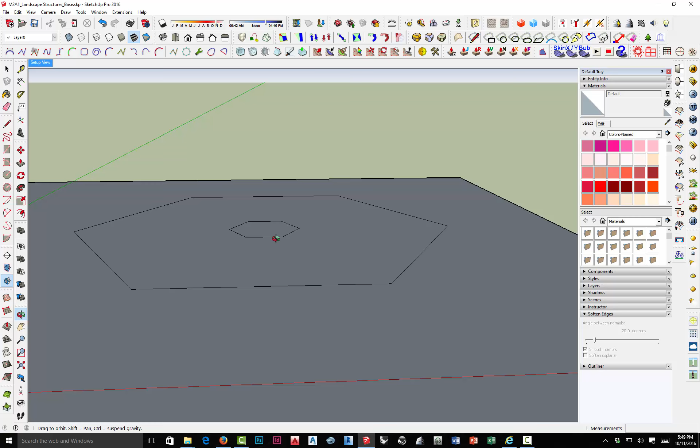For starters, remember we're going to use this as a path, but not all of it. So I want to right-click and choose Explode Curve. Now I'm going to pick the pieces that I need, Shift-Select, Extensions, and Weld. Now that I've got that selected, I am going to use the Move tool and do a copy of that. I'm just going to drag it up here and type 1.5 feet. And now I've got my starting point.

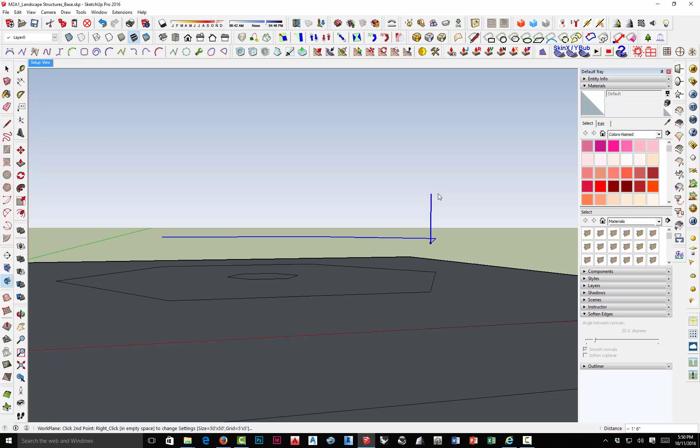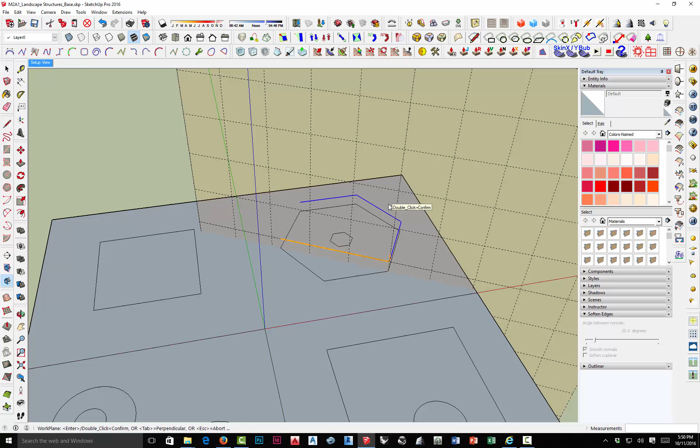From here, I want to draw a cross-section of the bench perpendicular to that line. Since I need a surface perpendicular to that, I'm going to go to Tools, Work Plane, and choose New Plane. I'm going to start by clicking on my origin for the plane, and I want to define the vertical. It doesn't matter how far you drag this up, just as long as you get the blue axis. Next I want a perpendicular plane. If I spin around here, you can see that that's not perpendicular, but this line is. By clicking on there, I've defined that new work plane. You'll notice if I hover here, it says double click to confirm, which I did. Now I've got a nice work plane that I can draw my bench cross section.

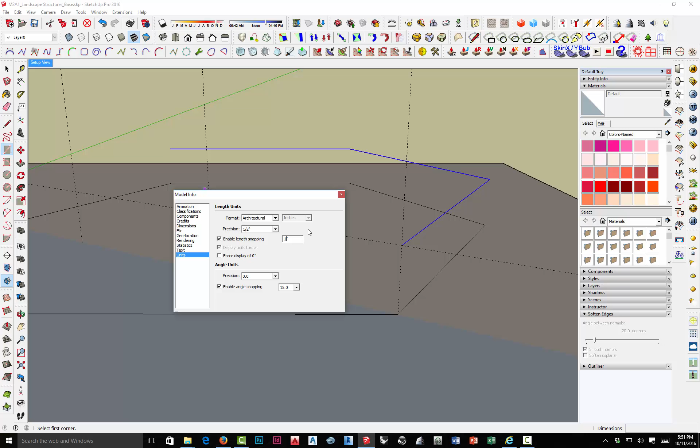To do that, I'm just going to use the rectangle tools. The other thing I want to check is Window, Model Info, Precision. I want to go down to 1/2 inch, and snapping also to 1/2 inch, then hit Enter. Now I've got that accuracy, so I can do a 1.5 by 3.5 inch 2x4, which is the actual dimension of a nominal 2x4.

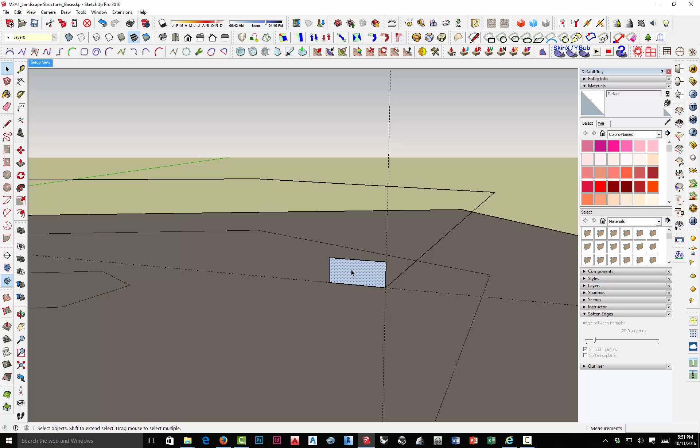I will start here at the end, and you can see if you look at the value control down there, I've got 3.5 by 1.5. Then I'm going to double click on that, use the Move tool with control to copy it, and do a 3x. So I've got my 4 2x4s lined up there, which will be the seat of the bench.

Just hold Shift and double click on each of those, and I'm going to make a temporary group. I don't have to do this, but it keeps my geometry separate, and I'll ungroup them later to do the follow me tool process.

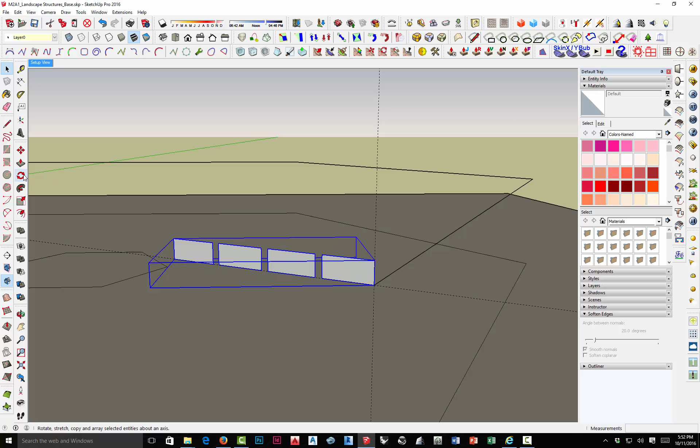Now I want to use the rotate copy. This is my center of rotation, my reference point. Tap Control, and there's 90, and in class I just said, well, let's make this 100. That puts me in a pretty nice angle. If you want to change it a little bit, that's fine with me. Once that's done, I'm going to move this to here, and then 1/2 inch above that. Again, you can see in the value control box in the lower right corner, it's at 2 inches—that's 1.5 and 1/2.

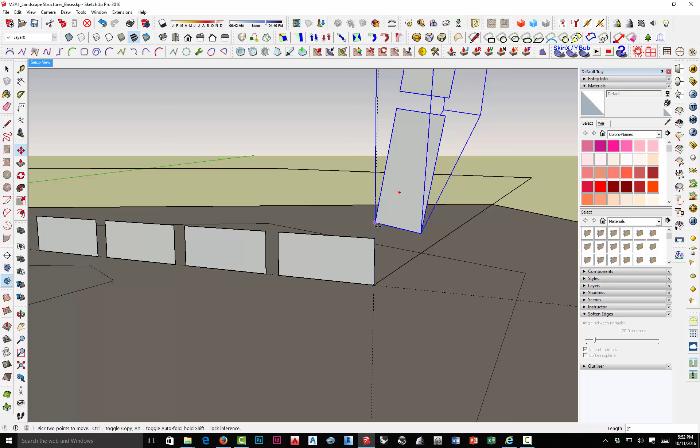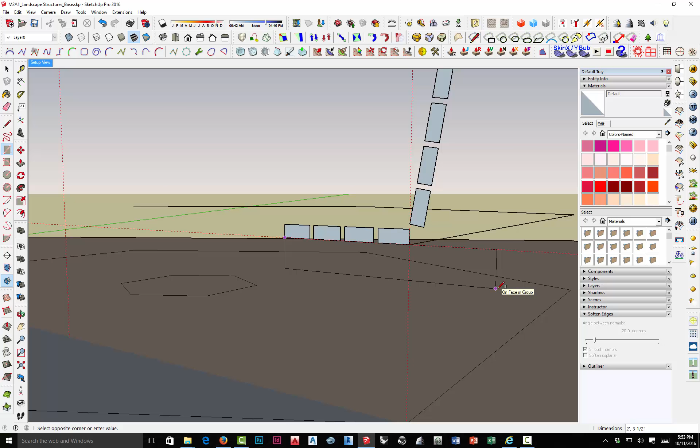Okay, so there I've got my cross section, my bench seat, and my bench back. Then I'm going to go back to my rectangle tool. A couple of you in class today somehow did this and it wasn't lined up, but if you snap to there and you keep on this plane, it should keep it perfectly lined up with that surface—this line should be right along the bottom of those. Since this is going to be another 2x4, I need to have it 3.5 inches, which again you can see in the lower right, and I'm going to make it 2 feet, so it's 2 feet long by 3.5 inches tall.

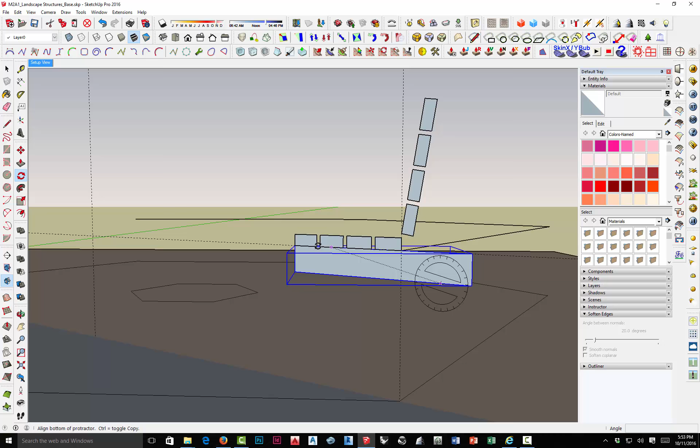Once I draw that, double click, group it, and now I can also do a rotate copy with that. I'm just picking it—I can do it from here, it doesn't really matter, but I know I don't have to rotate it way back here, so I'm starting just somewhere in here. Click, reference, tap Control, and in this case I'm going to hover over that and move till you see that magenta highlight, and now I know I'm exactly parallel with those.

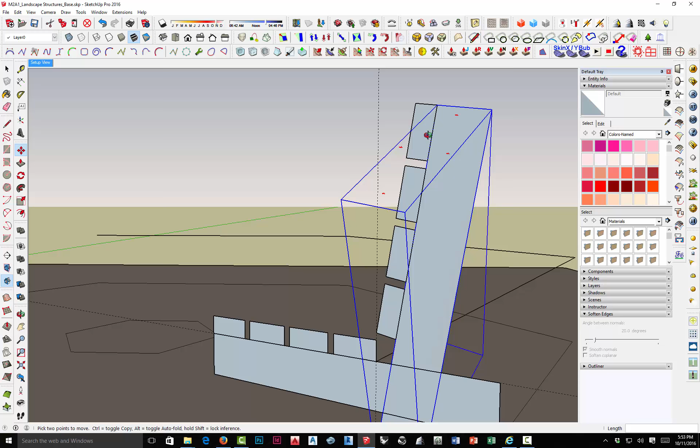Now I'm going to grab this corner and snap it right to that corner. You can see when I first started moving it, it wasn't quite catching, so I zoomed in and got the corner, and now I can see it snapped exactly along that path. So I've got that in there, but it doesn't really line up — I've got these extra pieces, and I don't really want that.

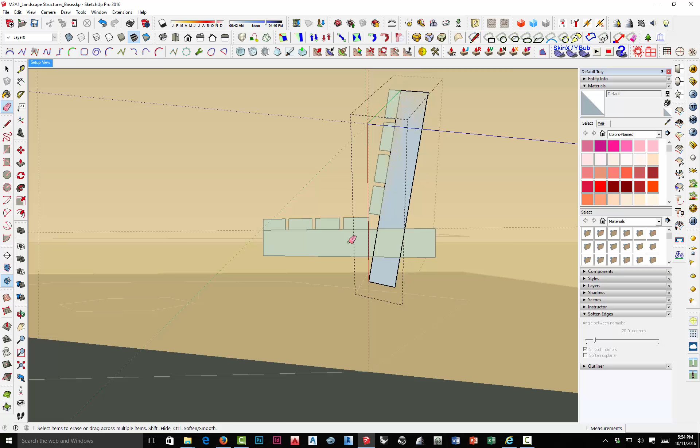So let's start with this one. Open this group, get the line tool, just draw across this intersection right here, activate the eraser, and erase these pieces. You can do the same thing with the horizontal one — double click on that, activate the line tool, draw that, get the eraser, take care of that. That will become my bench support and the back support, and we'll leave that for right now.

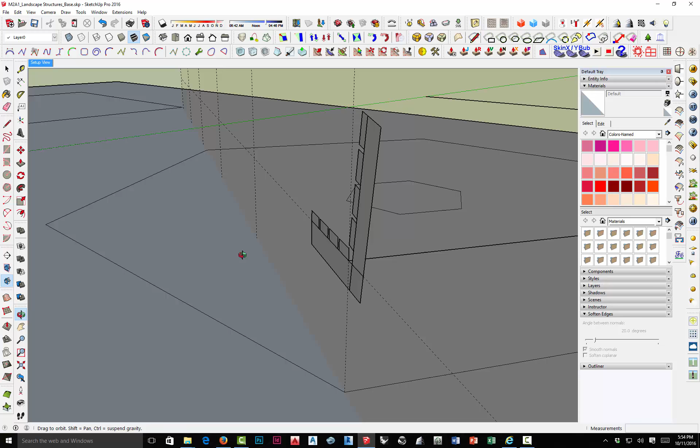I like all that right on that reference plane, so I can use that to start with, and everything's lined up. Now I'm ready to actually extrude the bench, so I'm going to select this work plane, right click and unlock it, right click and hide it, because it's kind of in my way right now.

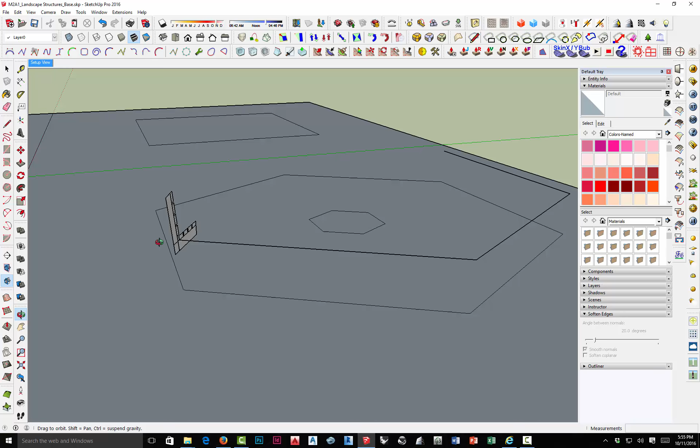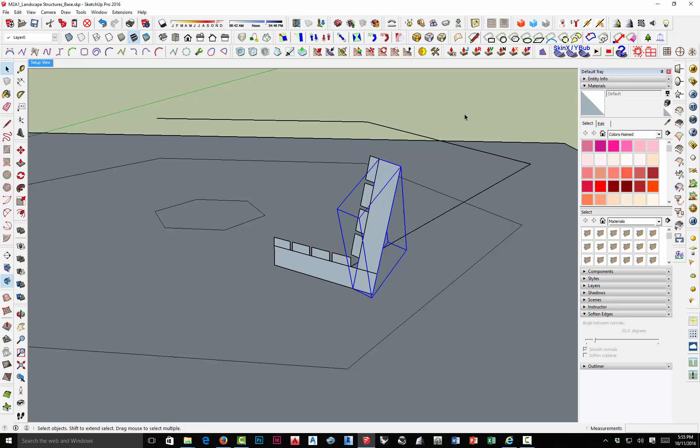Now that I have this grouped and this grouped and this grouped, what I need to do before I extrude this, in order to do it in one piece, is select this and explode it, and select this and explode it. Okay, you do not want to explode these two — some of you did that in class today. You don't want to do that, because the only thing we're pulling around this path are the bench seat and the bench back. So do not explode these two pieces. You'll see what we'll do with those in a second.

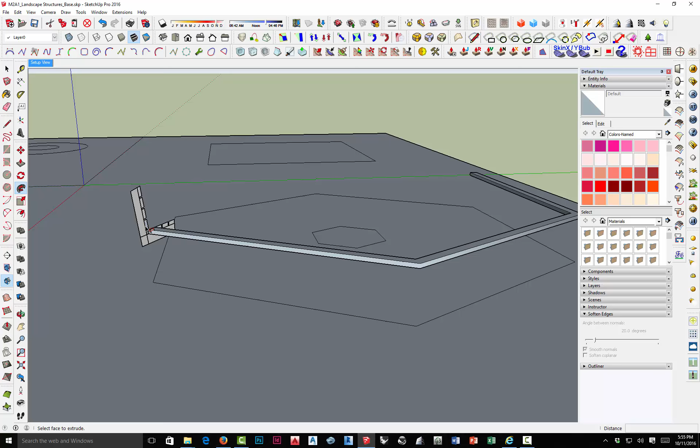Now that I have those done, I can select the path, and since I've welded it, I just need to click on it once, get the follow me tool — well, I could start with this. I mentioned this in class: if you click on that, it will extrude each one of those around the path. I'm going to undo that, because that means I'd have to click on that 8 times. Since I don't really want to do that, it was actually a little premature hurrying through this.

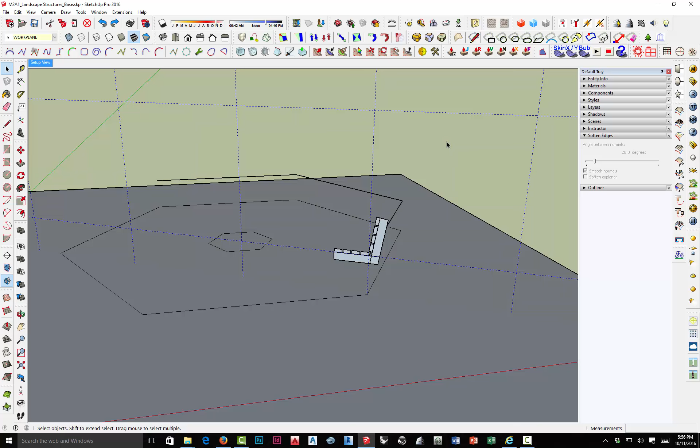So I am going to go back to View and Show Hidden Geometry. Right click on that and say Unhide.

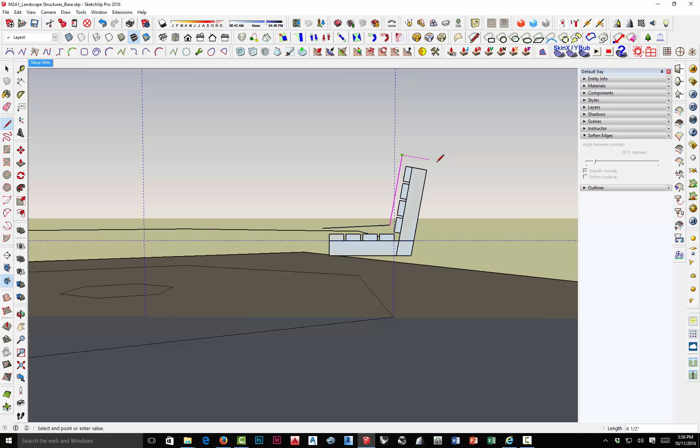Now that I have that showing, I'm going to use the line tool and just create a surface. You want to move this so you're not snapping to anything else — all I want to see is the magenta inference that says On Face in Group. Everywhere I go, On Face in Group. Just go all the way around the outside, and then back to there.

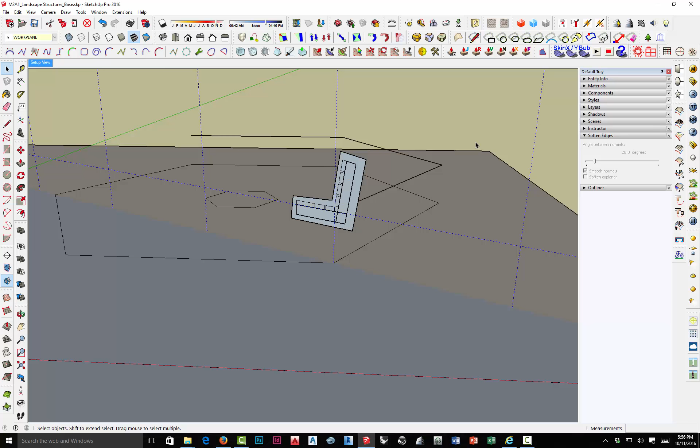If you do that correctly, you should get a surface here that when you select it, selects everything except what's inside these 2x4s, and that's exactly what I want. Now I can go back, select the work plane again, right click, hide it, and go back to View and choose Uncheck Hidden Geometry.

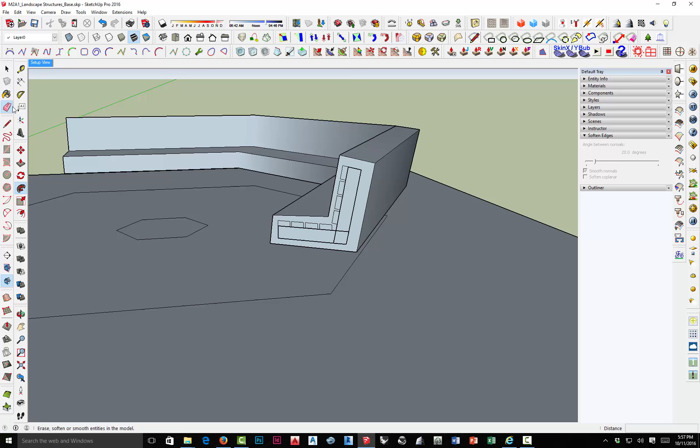So now I'm ready to do the same thing with the Follow Me tool. Click on the path, click on the Follow Me tool, move over this, and it just spun that all the way around — it pulled that along the path. I'm going to use the eraser, get rid of that, come over here, do the same thing. Once I disconnect it from these pieces, triple click, delete key, and you've got all that taken out of there.

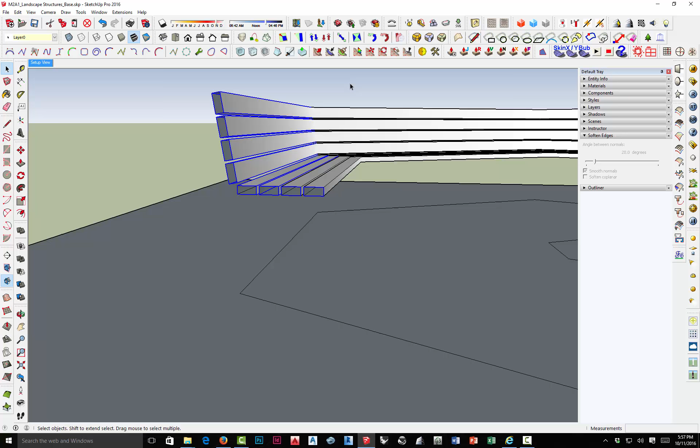And since I don't have this closed in, just drag a selection around that, go to Extensions, S4U, Make Face. And now that bench is complete.

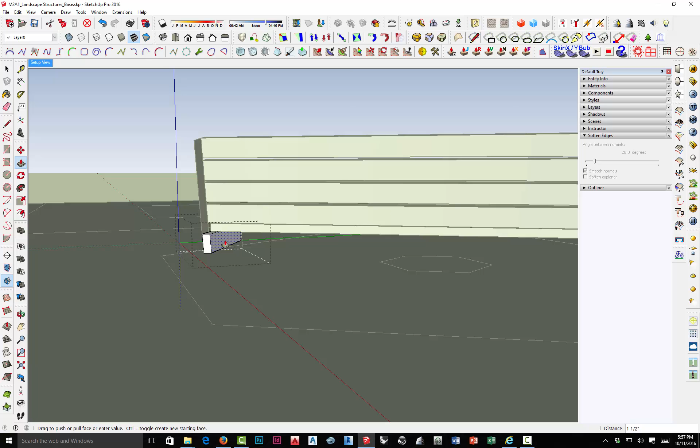The next thing I have to do are the supports, and that's what I've already started here. So let's give them some dimension. Open this up, push-pull 1.5 inches, close group, right-click on that, edit group, snap it to there, same, right-click, close group.

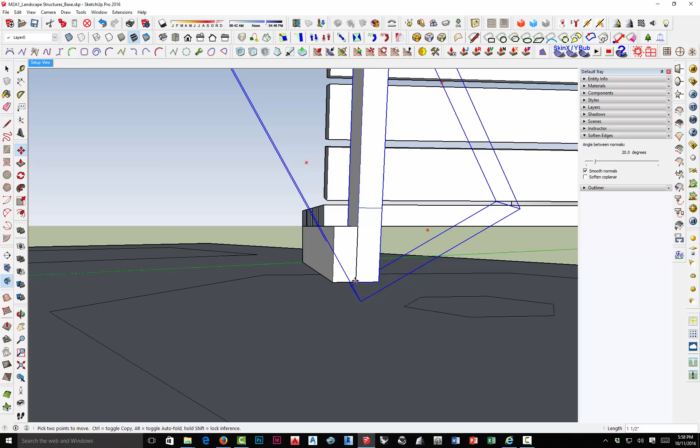Now in order to line these up, I'm going to switch to the Move tool. I'm going to start with this one, and I am just going to move that to there. So that's the way I want it to be — horizontal on the outside, vertical or angled vertical on the inside.

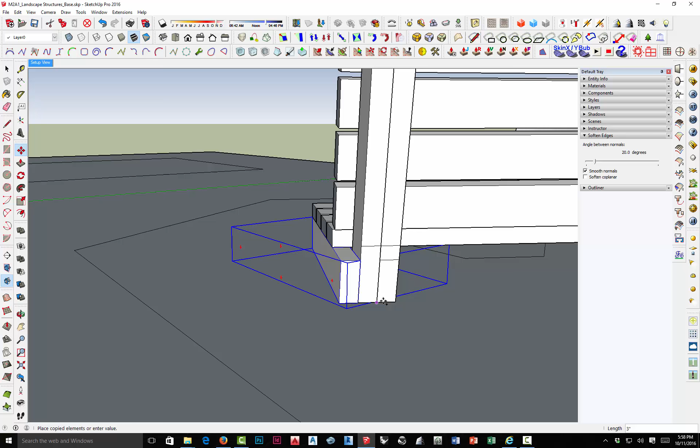I'm going to make another copy of that. Click, Control, snap to there. That's good. Select the horizontal one. Move tool, click, Control, snap to there. Got everything copied. Now I will select this and this.

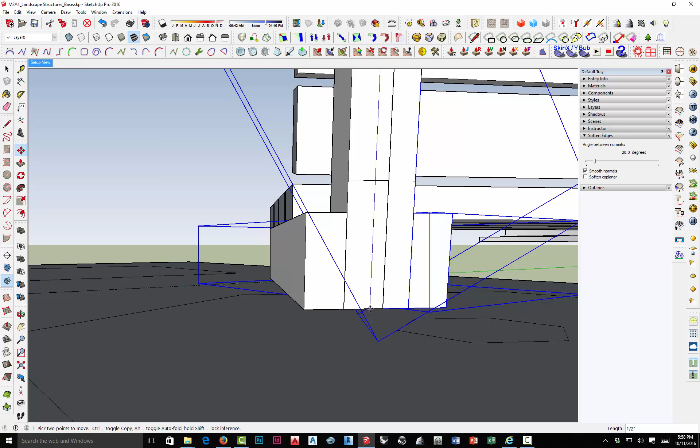This is because I want to fit a 3.5 by 3.5 inch post in here. This is 1.5 and 1.5, which is 3, so I need another half inch. I am going to use the Move tool, actually sliding back on here for a second so I can get that.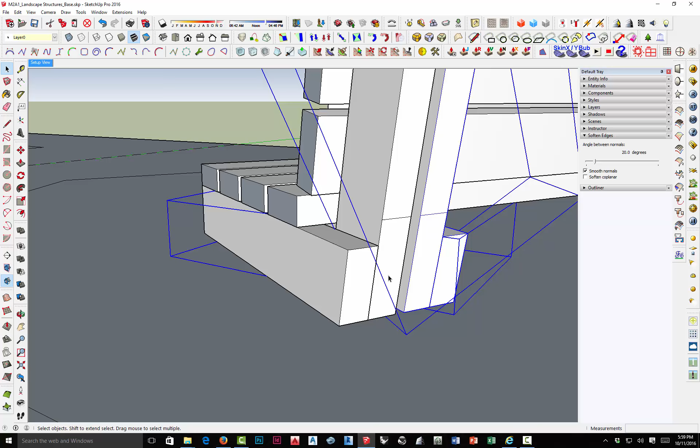Again, I'm going to get that tool. Now I've got parallel to the edge. It says 1/2 inch in the lower right, which means I have 3.5 inches between there. I'm going to get this one and this one, select them all, right click, make component, and call that bench support.

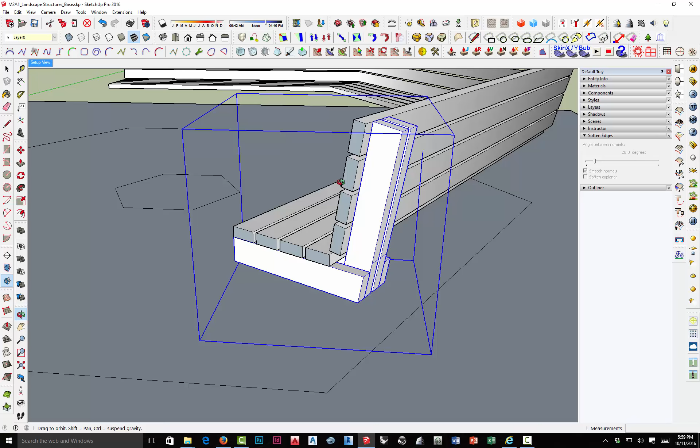Now that geometry won't be repeated everywhere. If I want to edit these things, I talked about cutting those down in class. So to do that, double click, get the line tool.

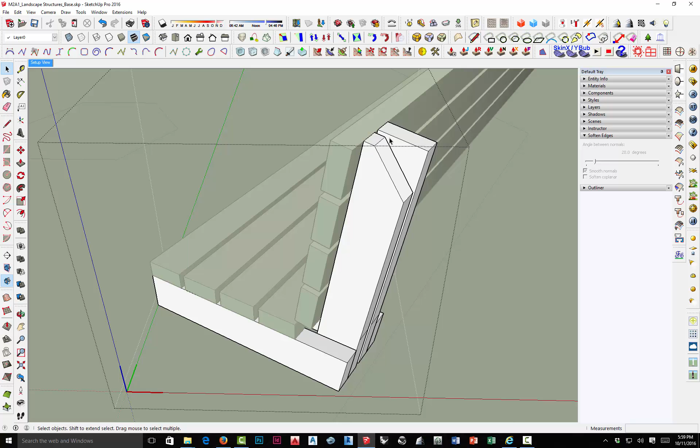Click there, push pull, knock that out, and then I've got that done. If I want to do the other one, I come in here, open that up, line tool, zoom in, take that across, click. I'm not getting that snap, pull it across to there.

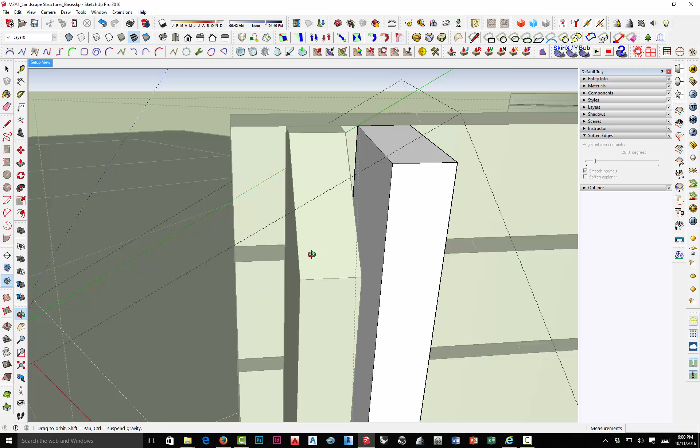Oh, that's because I am not in the group. So let's get inside the group, line tool, snap here, move over. Can't get that, take that. All right, let's see if we can move around and get that.

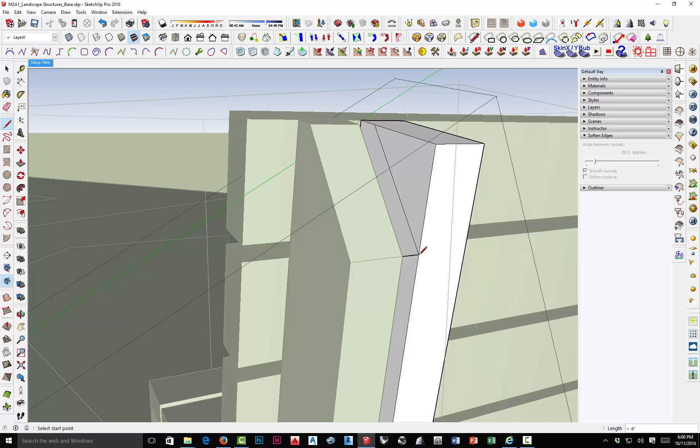Now this should be giving me the prompt for that angle. Since I can't get it, I'll just get the line tool, snap to that edge, hit the line tool again, come over to there, down to there, and get rid of this line.

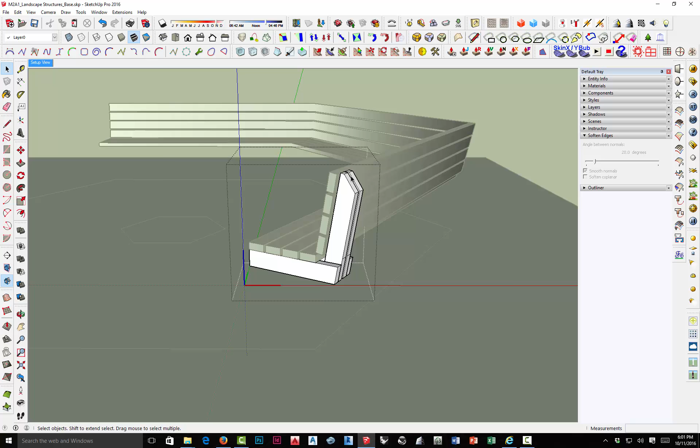So if it doesn't work, just use that to set up your lines, and then pull this over, and we've got that. I'm not going to do it right now in the tutorial, but you can do exactly the same thing down here. If I would have done that before I pulled them out into a thickness, I wouldn't have to do this twice. I didn't do that quite in the right order, but you can fix it.

So that's a component now, and the only thing I really need to add is the post. I'm going to zoom in a little bit here and open this up.

In this case, I will use the rotated rectangle tool. I'm looking at 3.5 inches, and then 3.5 inches there. Get the select tool, double click, make it a component, and call that bench support.

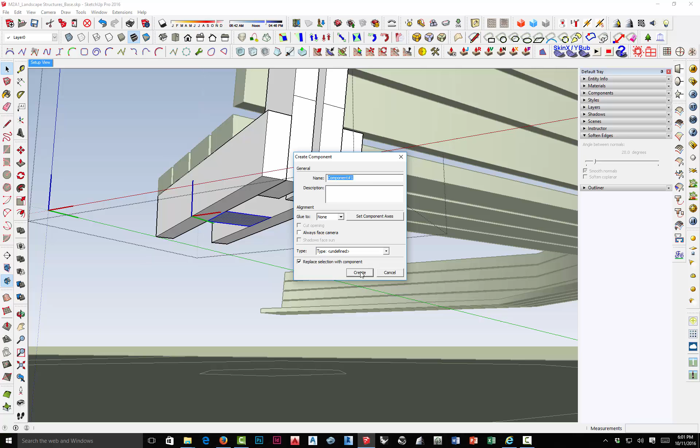I've done this before, so I'll just say yes. Now that it's created, I want to move it up a little bit so it doesn't look like it's just hanging at the end there. It doesn't have to, just enough up there. Now I can open that up, go to push pull, and just snap it down till it hits the bottom of that.

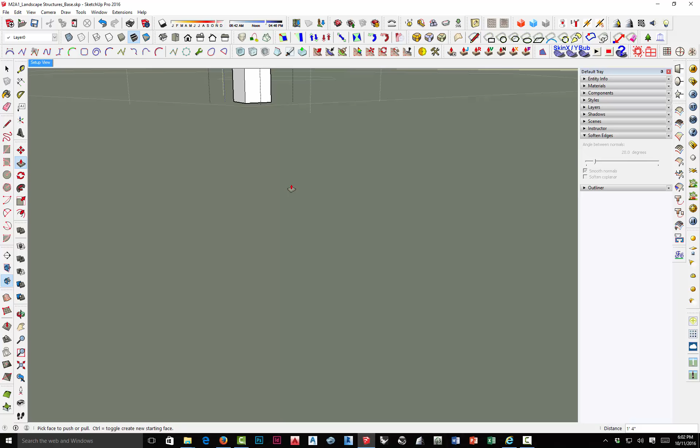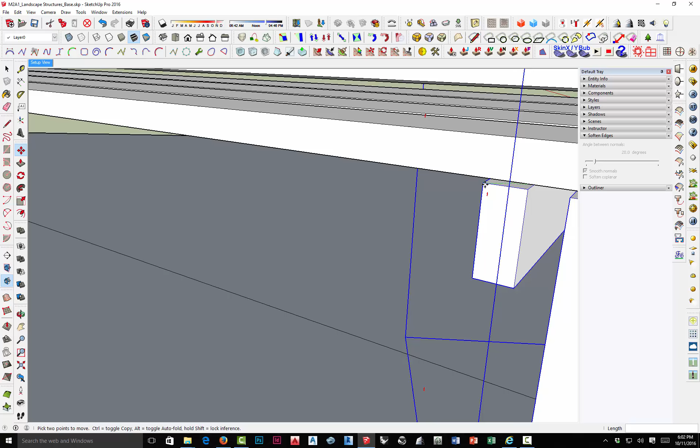Okay, now I'm outside of that. I've got that entire thing grouped. To copy that around, I will select it, back to my move tool. In this case, I'm going to snap right there, tap Control, and snap that to the bottom.

Since I want another support in the middle, I will do /2. You can see that in the lower right. Enter, and it puts that copy right in the center. Now that I've got one side, I can repeat that on the other.

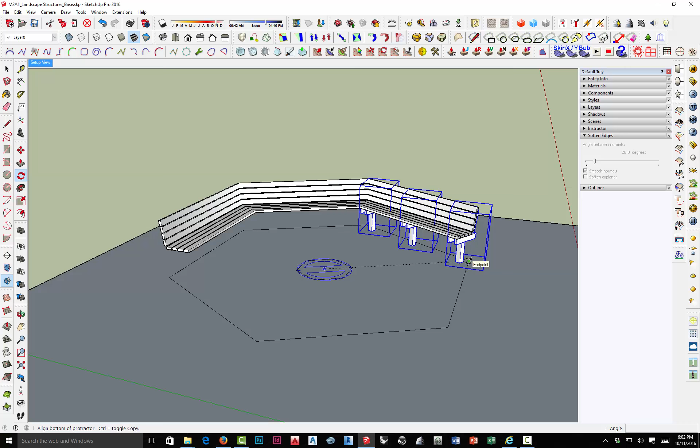Click, shift click, rotate. Find the center of this right there, the edge. Click, tap Control, and snap to the end point there.

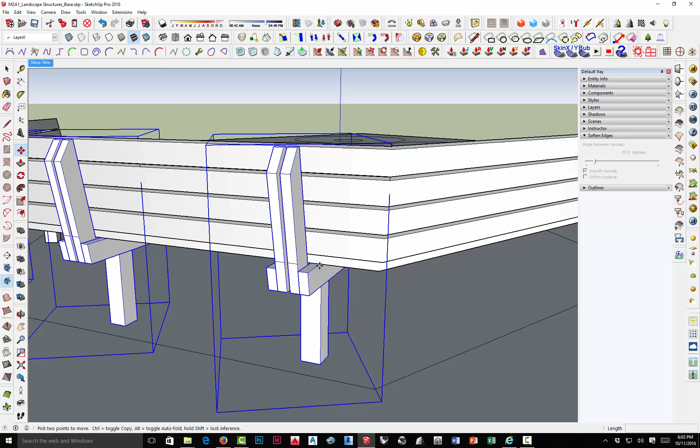Now you can see that that's a little tight there, but that's the kind of adjustment I can do. I can either, now that I have that, use the move tool, move those all down a little bit. Maybe I need to just move that one in.

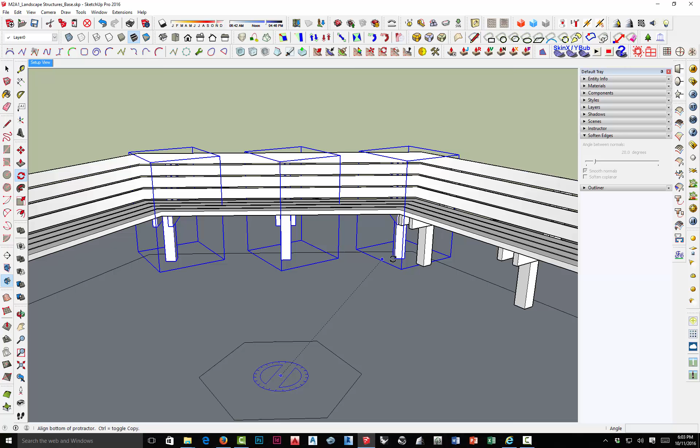You can recenter those however you like, but I've got them copied, so I will do another rotate copy from, come on, leave me the center. There we go. Find that corner right there. Tap Control and snap right there.

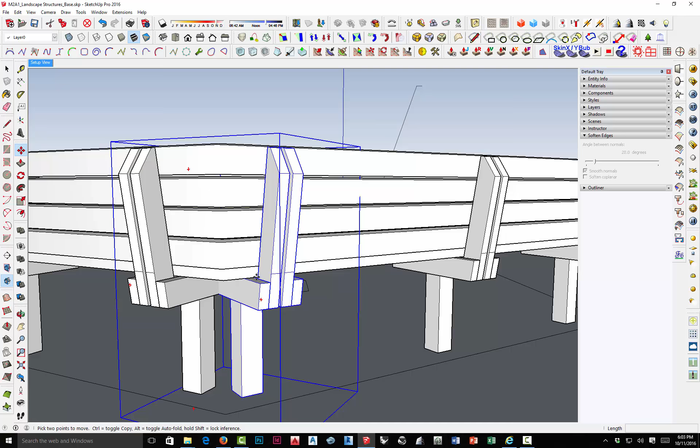So once again, you can see in order to center those, I need to move this one down, maybe move this one in a little bit. Just snap along the edge and pull that in and adjust it so that they're not interrupting each other in the front there. Okay, and that's how you put that bench together.

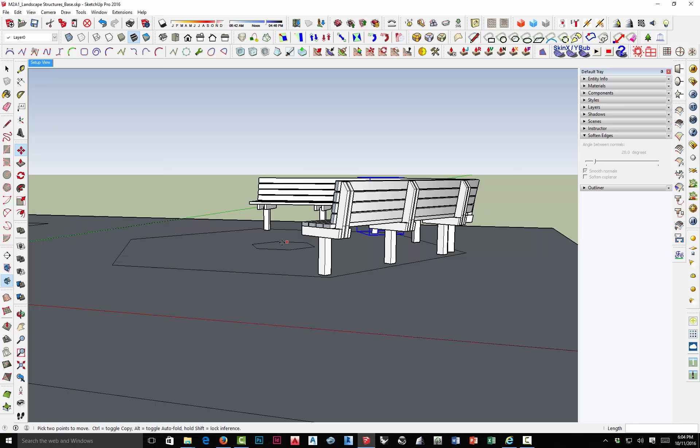Two sections, the actual bench and back itself. Then you make one of these bench supports, copy that along one side, and then use the rotate array to copy it onto the other two edges. And that's how you put it together.